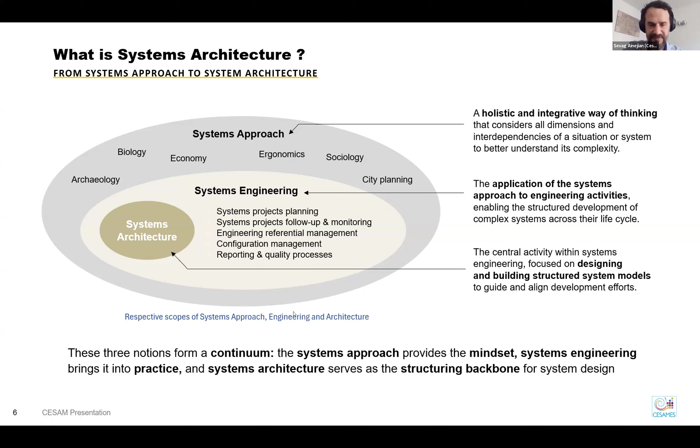So those three notions of approach, engineering, and architecture are a continuum. The approach is the mindset, wanting to understand any problem, any scope in 360 degrees. The engineering is the application of that in practice for development. And the architecture is like the backbone that structures the application in engineering. So that's the first thing we want to present before jumping gradually into a framework.

So let's take the example of Paris. I'm not going to ask you if you've been there or not, but it's quite a complex city, like a lot of other cities, like Mexico, obviously. So let's say you want to visit Paris. Someone who wants to visit Paris cannot just look at this and know what to do. At different moments, he will need different views, different representations.

The first one can be, what do I want to visit? So I'm going to look at a view of places to visit, which clarifies the places to visit. Then maybe I want to know how far I am. So I may need the street view that shows me the streets of Paris and can calculate distances. But then I need to wonder if I'm going to go with transportation, or maybe with my bicycle or a car. And so I need another view that will provide another type of information.

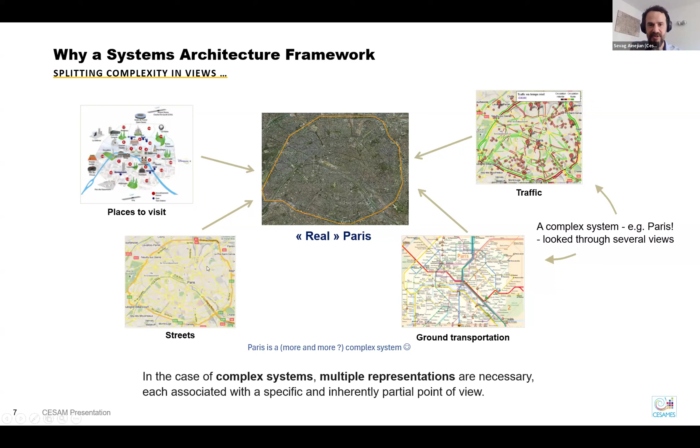So here we are looking at the complex system, Paris, through several views. And that's the principle that will lead us to a framework that says, if you have a complex system, you need multiple representations. You cannot represent all that we have here on one view, otherwise you just don't understand anything.

And then we have those views, but maybe someone will ask for a view about the trees, about the temperature, a view about anything, and you're like, okay, we need to limit the number of views, otherwise everyone will describe something different. And that's where emerges the notion of a framework, saying, okay, we have a lot of things we can represent, but let's structure that. Let's define the different views. Let's define their content with the same understanding.

What is a tree? I want a tree. What does it mean to have a tree? What is a street? What is, I don't know, a pavement? All those are not ambiguous. They are very well defined, so you can make those views. And so to limit the number of views, and for everyone to understand them the same way, that's the mission of a framework.

A framework will provide the conventions, the rules to describe a system, saying what we describe and what are the views to describe the system in a clear and unambiguous way. That's a simple way to introduce a framework. A framework tells you how to describe a system. We need to be aware that a framework is one of the 4 pillars to apply correctly model-based systems engineering, which is the application of modeling for systems engineering. And at CESAM, we like to see it not as 3 pillars, but indeed as 4 pillars, if you've already looked at this topic.

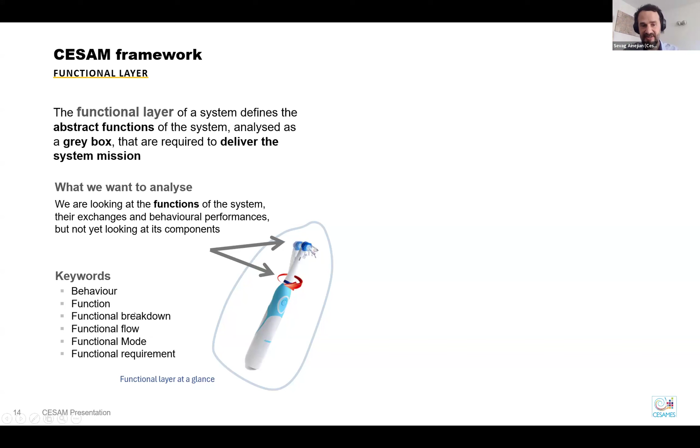We're not looking yet at the actual toothbrush. We know that maybe it's going to rotate, maybe it's going to apply load, whatever, but not yet the solutions. So here we talk about functions mostly, flows, modes, requirements breakdown. And you have a few examples of functions for the toothbrush. Let's say you've analyzed and you say, okay, we need a control and command function. We need to provide force because it's the core reason of the toothbrush. Those are examples of functions, things that the toothbrush needs to do.

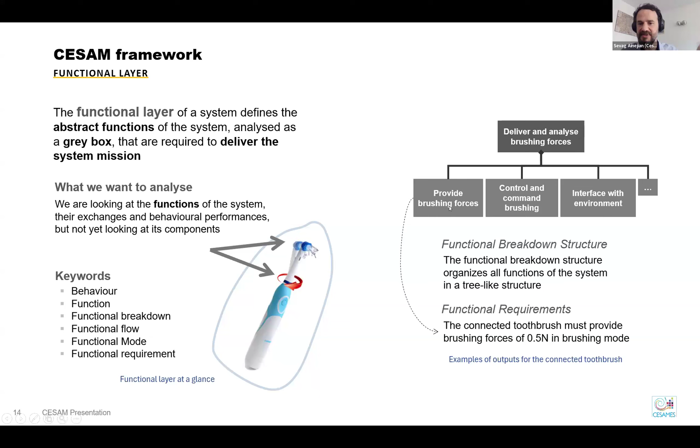And associated to those functions, we're going to have requirements, which are, let's say, the performance. How well, what is the level of force? What is the frequency of update? All this kind of performance that is going to be associated.

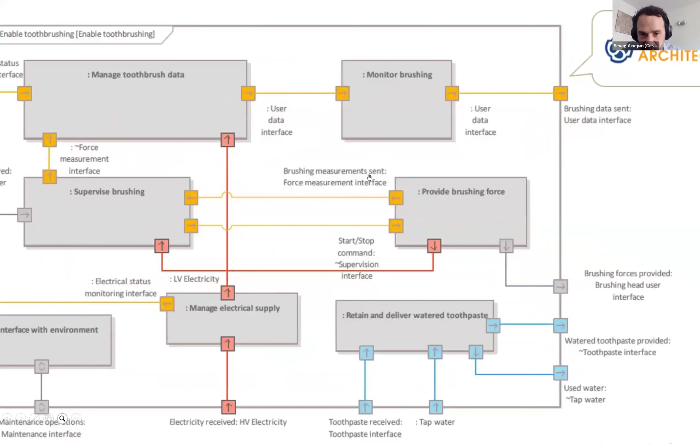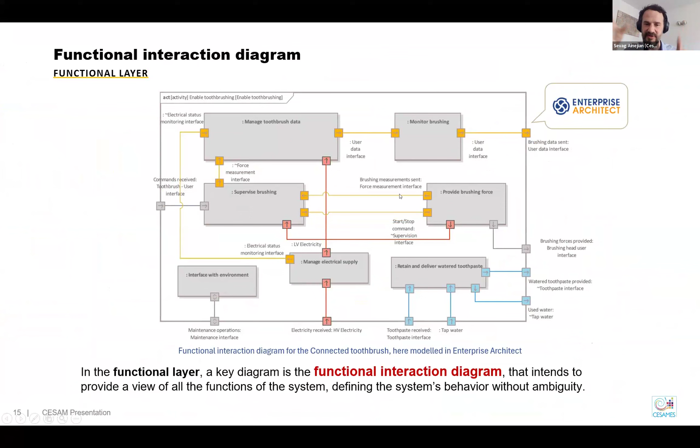And here you have a key diagram, which is the functional interaction diagram, that shows the functions and the flows that they exchange. So for instance, provide brushing force will send force and brushing measurements to the supervise brushing function. This is just a zoom on one part of that diagram, modeled in Enterprise Architect, and very key to understand the logic of the behavior of the toothbrush, part of the functional layer.

Third layer, the constructional layer. Now, finally, as we say jokingly, we can finally define the components of the system. We could say we are looking inside, so it's a white box. But those components are here because they implement the functions. Remember, we have the arrows between the functional and the constructional layers. And so we give a reason for those components by allocating functions to them.

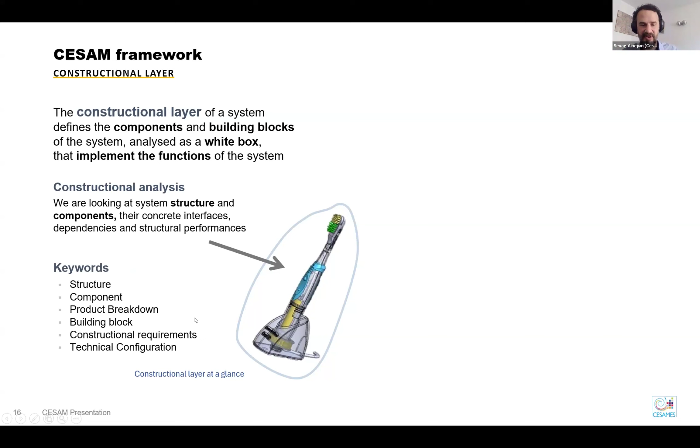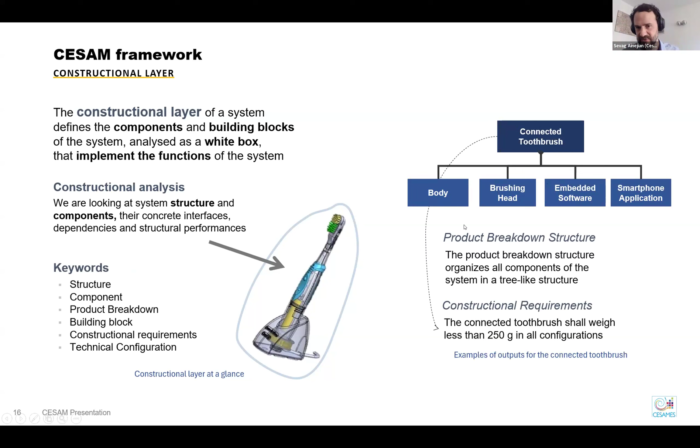So here we look at the functions and the components, and also at structural performance, let's say the weight, the dimensions, everything that is concrete that also needs to be fulfilled by the components. Some keywords again: product breakdown structure, building block, and a couple of examples for the toothbrush. For instance, the toothbrush will declare that it needs a body, a brushing head, software, an application because it's connected, and an example of constructional requirements, which can be the weight of the toothbrush in this case. But of course, other requirements will be applied.

Yes, we'll answer that question. Okay, I can almost say yes, but let's look. One key diagram: we have the product breakdown, which is key, and the constructional interaction is, let's say, the mirror in some way of the functional interaction.

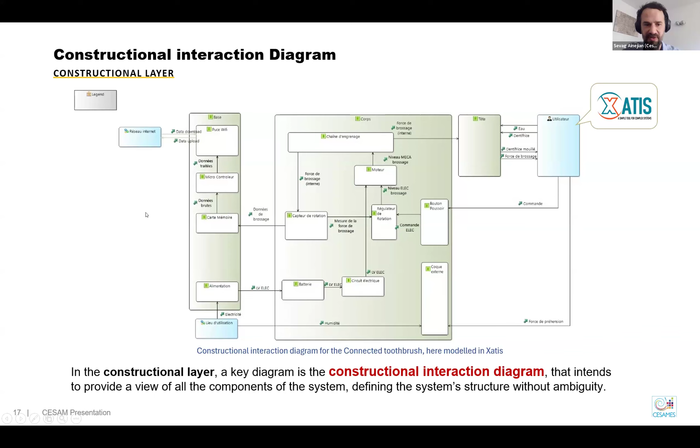But now we look at components, and that really enables us to understand the scope. That component has those interfaces, and it's developed by whatever team, so they know exactly what they have to develop. And in this case, it's modeled in Xatis, which is a recent tool developed by the Safran group, and that embeds, by the way, the CESAM framework inside.

And finally, to show that it's not only 3 views: we showed you the 3 layers, but indeed in each layer, the magic or the simplicity of the CESAM framework lies in the fact that, as I already told you, we analyze the environment, we analyze the behavior, we analyze the structure, but inside each layer, we describe exactly the same thing. We describe properties, states, static elements.

So I'm not going to give you the detail today, but once you've understood what each aspect means, and you've understood what each layer means, then you can redemonstrate, you can rededuce each view as the intersection of an aspect and a layer. So when you understand that, you really have a logic, a mathematical rigor also to understand each view and know what it should have.

So it makes the CESAM framework scale, because people don't need to learn so many concepts. They don't need to know the difference between a need and a constraint, the functional requirement and the non-functional. There are really concepts that we get rid of for people to focus on what's essential.

Okay. So let's go now to industrial application to understand what we've applied and what can be applied, what are the benefits in real industrial context. The first thing is about modeling in tools. So we quoted Enterprise Architect, Rhapsody, any other tool. The difference when you have a framework, and we've seen many customers who are not aware and they try to build a framework because they see something is missing, is that you could see the framework as an intention.

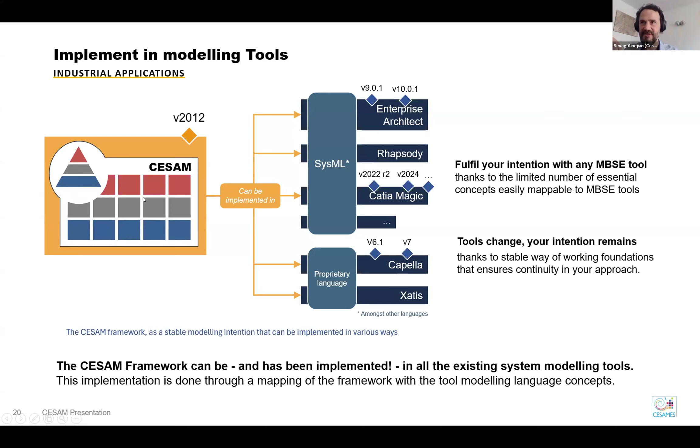Whatever the language, if it's SysML or another language, we do a mapping of the framework and of the modeling language concepts, and we are able to represent the CESAM framework in all the tools that are quoted here. And the benefit of having this on the left is that the intention is stable. The tools change, they have new versions. SysML will also change very soon. We're not far from that, but you've still learned what you want to do, and you will know how to do it in a different way. And that's quite efficient.

That's about tooling. Now it's about people. The CESAM framework is also used as a language. It has concepts, definitions, relations. Some people can call that an ontology, a metamodel, a dictionary, anything. It's a language for people to understand each other. So I'd just like to show this very simple example.

Let's say you are a company, different teams in different countries. I've not been struggling, but I've learned a lot from a mission on that. You have a team that works with Rhapsody. You have another team that works with Capella, and another one is learning Cameo/Magic. And everyone has an experience, a different way of doing systems engineering: the SysML guide, the INCOSE handbook, ISO 15288. That's their background, and they're working in different tools.

And let's say that one team is going to say, okay, to do the functional, well, we need to model functional blocks, we need to do activity diagrams, and we need a satisfy relationship with the requirements on that diagram.

But then the Cameo/MagicDraw people say, but no, guys, you need to follow the functional analysis of ISO 15288, and requirements are not an artifact. And the Capella people will say, but where are your logical functions? And you need a specific viewpoint. And no, we don't do activity diagrams. And you're like, do we understand each other?

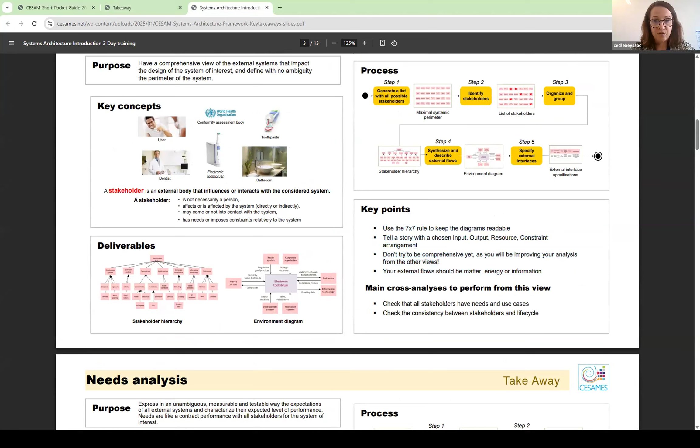A second resource you can download for free is our takeaway material. For that, we have two formats: one is an infographic version designed for use in presentations, if you want to present to other people what the CESAM framework is, for example. The other is more a compilation of all our key takeaways organized by theme, with one page dedicated to each theme. So in one page you have all the major concepts explained, the key concepts, the key principles, but also practical feedback and lessons learned from our clients on the application of the CESAM framework, with the key points, for example.

So once you have read the Pocket Guide, you can download the takeaways. Could be a reminder on your desk. So step by step, you can download the free resources.

So let me show you our training catalog, just for you to have an idea of what kind of training we provide. Our training courses cover all the MBSE life cycle, all the population and all the maturity levels, and they are all in English and can be provided online, okay?

So of course, we have first how to raise awareness in the system approach if you know nothing and just want to increase awareness of the people about what it is. Then we have material for mastering system engineering fundamentals at the CESAM framework, but also how to implement this framework in others, with links to other frameworks such as NAF or Arcadia and so on.

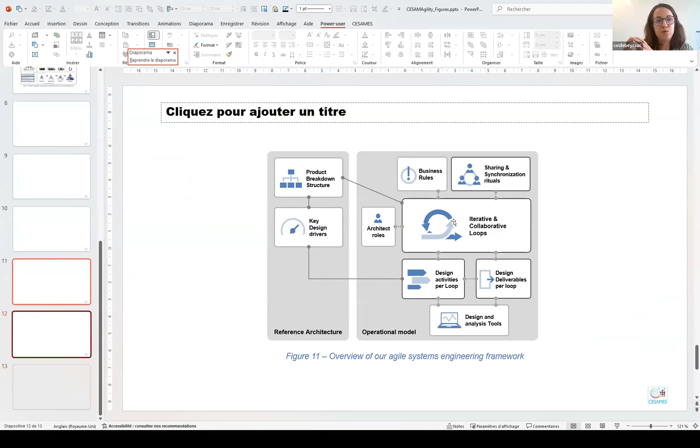And at each maturity increase, you check that you have reached what you wanted to reach. So you can see the framework as a way to put some borders in the agile way to implement it.

I don't know if you want to add something, maybe. No, I'm kidding. Yes, it's true that we tend to use just, not the 15 views that I showed, but mostly the central views and the needs and the product breakdown, the key design drivers, which is usually the name in this case that Cecile mentioned. And basically, really the agile is on the right, it's about how you're going to work. The target system is on the left, it's really the approach we already saw.

And then it's about who does what, how do we organize in iterative loops, and what do we synchronize. And the key thing is about knowing the maturity, because if you do a detailed design while you're still in an early phase, you waste your time. So they are perfectly matchable. It's true that people think they're contradictory, that architecture means rigidity and agile means freedom, but it's really taking the benefit of both. So yeah, I just wanted to show this little sketch.